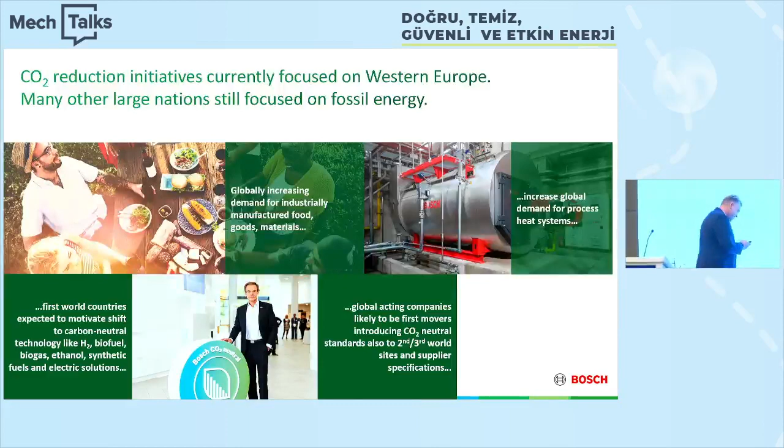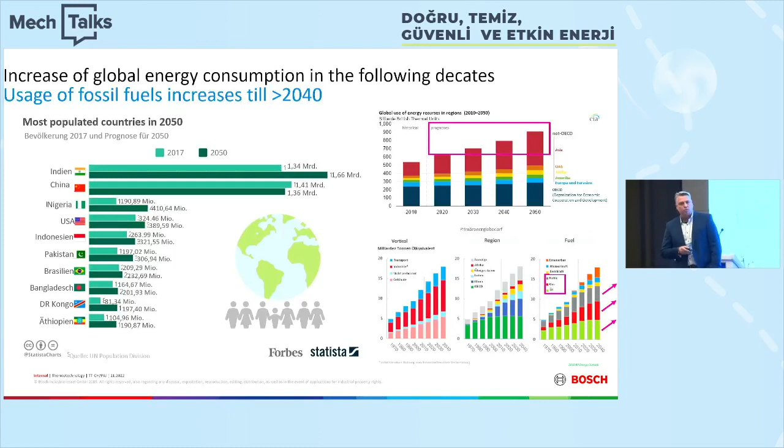So when starting a project to be CO2 neutral, I have basically two options. First of all, optimize my existing plant with energy efficient solutions. The higher the efficiency of my plant, the lower my fuel consumption. And we believe 20 to 30% of the energy used in the world nowadays can be saved by using the right technologies, which are available.

The future is the use of alternative fuels. Alternative fuels are available nowadays, but in very small amounts. And it only makes sense if these fuels are produced green, with green energy, and then they call it carbon neutral.

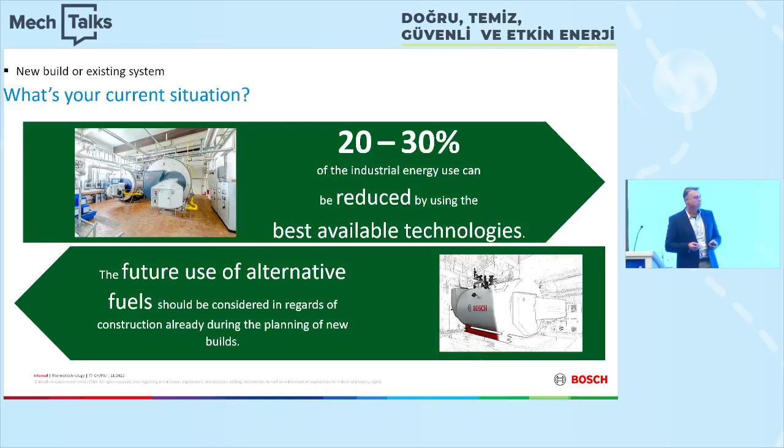What are alternative fuels? Or what are the main characteristics an alternative fuel must have? First of all, it must be available. I don't need to plan a plant for H2 firing if I don't have H2 available. I come to this later.

It must be ecological. That means it makes no sense to produce these fuels with a high amount of energy, like electric energy, or even hydrogen. But there are different hydrogen levels, I'll show you in the next slide. It must be economical, of course, otherwise it does not make sense; it will increase the price of all products, etc. A certain amount is accepted by the population or the customer, but this always has limits. And last but not least, it must be storable.

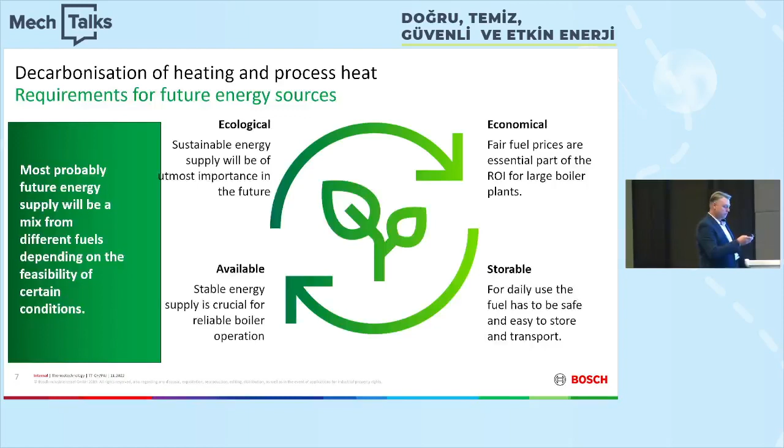So hydrogen. Hydrogen is now in everyone's mind as the fuel of the future. What is hydrogen? Hydrogen is the smallest atom in the world, and it has the ability to diffuse into metals. So this is a burden at the moment; special materials are needed for hydrogen. The flame temperature to burn hydrogen is about 2000 degrees centigrade. And hydrogen has about 3 times less heating value than natural gas, so the consumption will be 3 times more to have the same amount of energy or heat.

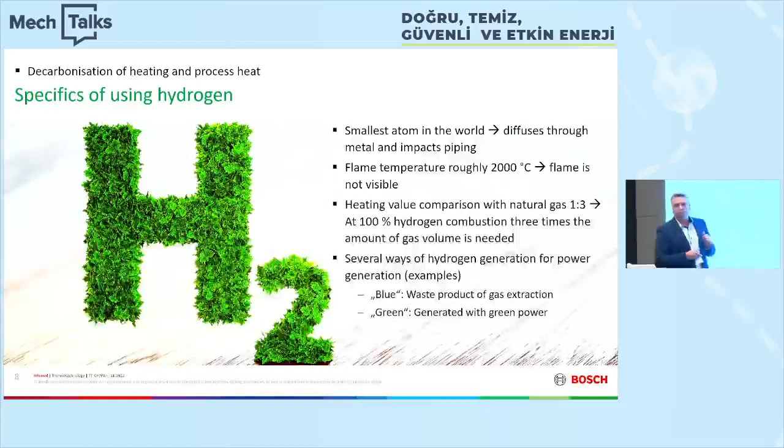There are several ways to produce hydrogen. One is called blue hydrogen and the other green hydrogen. What is the difference? Green hydrogen is CO2 neutral. That means it is produced using energy from wind or solar power, without using electric energy from the grid or the power plants. This is real green hydrogen.

Then we have something in between, called turquoise hydrogen. It's made by methane pyrolysis with energy from the grid, from the public network or the power plants. And gray, this is bad hydrogen. It's made by electrolysis with electric energy from power plants, could be coal, could be nuclear, whatever. Definitely, you need a lot of energy to produce hydrogen at this moment. And the question is, where does the energy to produce the hydrogen come from? Is this energy green or not?

The big benefit of hydrogen in any case is that it's storable. This is its biggest benefit, because storing electricity is quite difficult at the moment. You need big storage, large amounts of batteries, which are also not so environmental to produce.

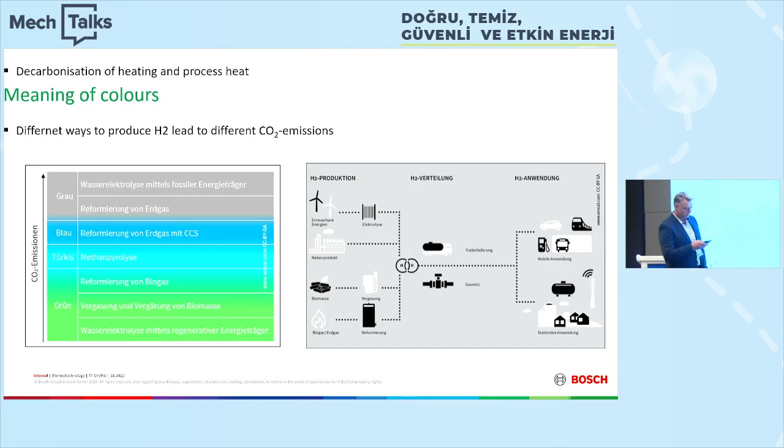So, overview. Motivation. What is the motivation to use H2 as fuel? Again, if it's available, it's a very quick solution to be CO2 neutral with my existing boiler. The existing boilers can be transferred or transformed to burn or to handle H2. It's not a matter of the technology, it's just a matter of availability. Also a fast and quick solution which is available. It is transportable. This is also a benefit.

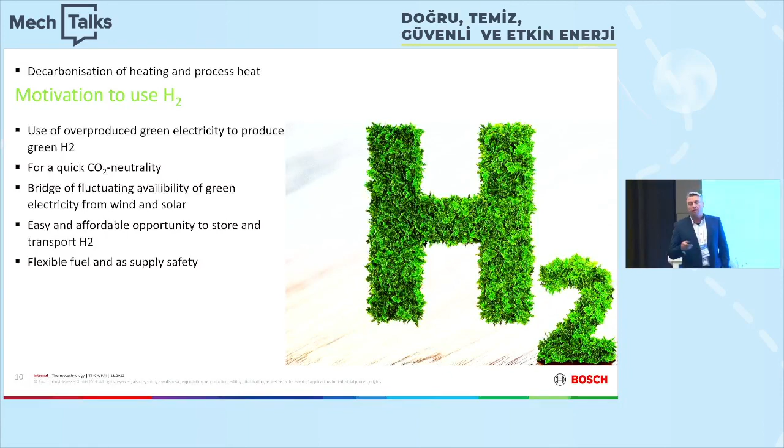Nowadays, the gas network is not capable for H2. Meaning, in Europe or in Germany, in the German network for natural gas, there is already 10 to 15% H2 in this network, but that's the maximum at the moment. So the complete network must be built to be capable for H2. And this is not a short-term, this is a long-term solution.

Again, a slide about the drive or the benefit of green energy, green H2. It should come either from sun or from wind or from any other source which we don't know yet. Heat pumps, geothermic heat from the ground, from the soil. So then water is divided in O2 and H2. We have H2 in gaseous form available. This can be burnt for the boiler, for the process heat, for heating. And it can be also transferred into electricity again.

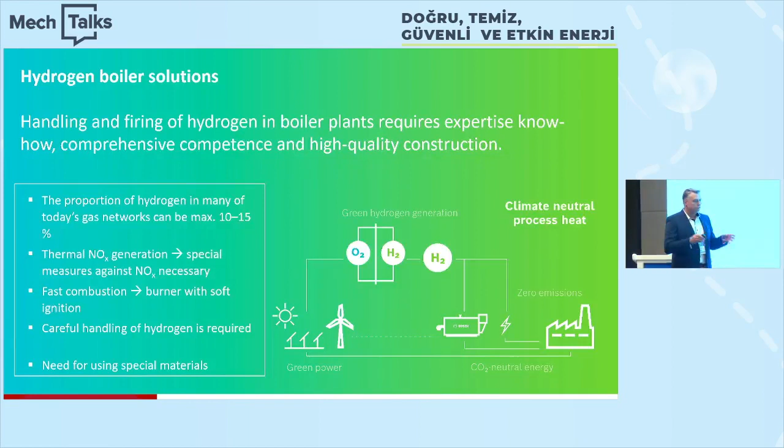Now you ask, does it make sense first to put energy in, to produce H2, and then with fuel cells you produce electricity again? This is only for storage reasons, transportable, localization reasons. What alternatives do we have to the hydrogen solution? Well, what is available at the moment? We have a hydrogen finished product on the market, which can run 100% on hydrogen. This is a conventional boiler with a special firing system, a combustion system, made for hydrogen. Okay?

Hydrogen ready is if a customer nowadays is investing money and he knows in the future, I want to be on hydrogen. He can buy a hydrogen ready boiler. And when hydrogen is available in 20 years, he only changes the burner side, the combustion side, and he runs on H2 and is CO2 neutral.

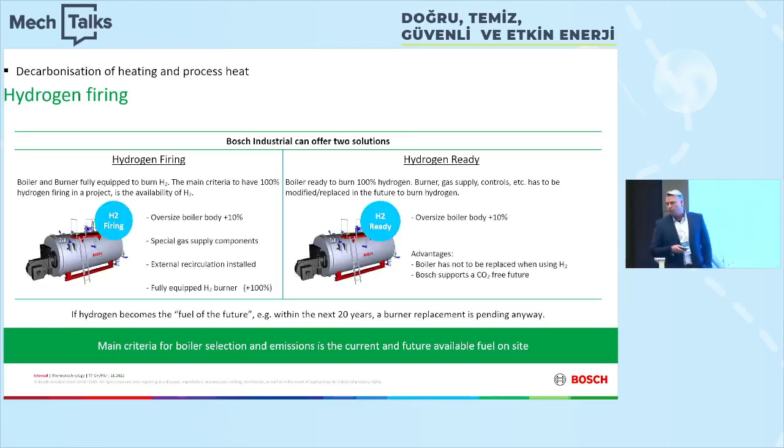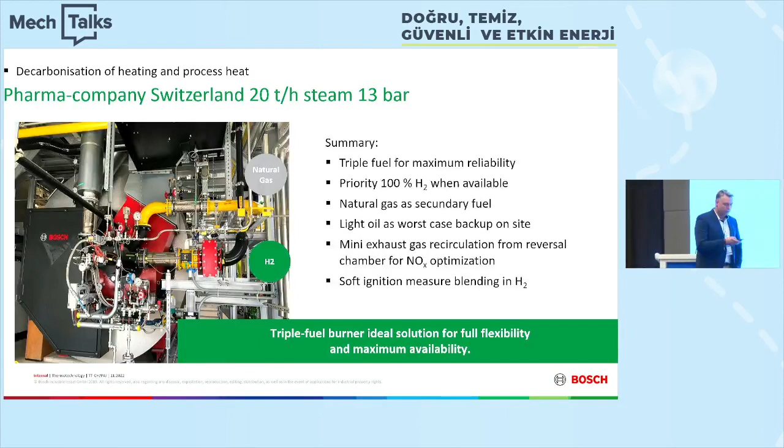This is an example of a company in Switzerland. It's a pharma concern, and they use 20-ton boilers running on 100% hydrogen already. They have the benefit that the hydrogen is produced in a plant next to it, and it's a side product of their process. So the benefit is also it's close, it's available, and it's kind of affordable. Plus, for production security, the boiler is also still equipped with a natural gas line.

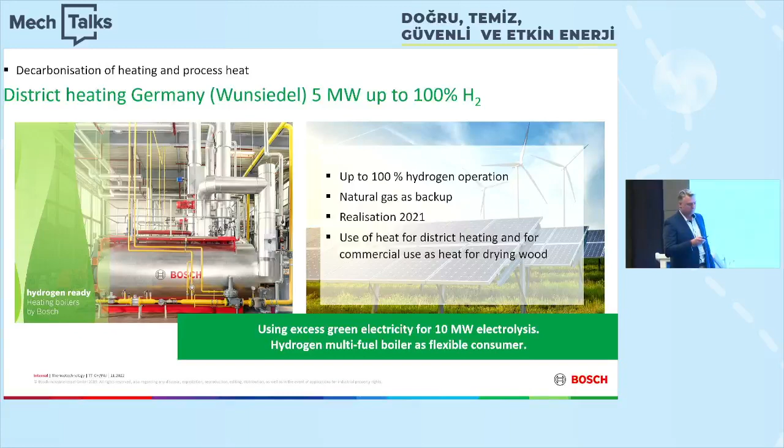This is a plant we have in Germany. This plant is a wood producing or processing plant. They do wood chips, they do decor woods, and they have their own energy supply or central. They use turbines. With the turbines, they produce electric energy. With the electric energy, they make H2. The H2 they use again for combustion, for firing. Also, you see they are available. Now, my time is running out.

Now you ask the question, why produce H2, using a lot of electric energy to do that, why not put that directly into the boiler to produce steam or process heat with electric energy? And this is our latest, or let's say since 2 years, our most asked product. It is an electric steam boiler, directly electrically heated, up to a capacity of 7.5 tons with a connection load of 5.1 megawatt. Does this make sense?

Yes, it does, if the electricity comes from natural resources, from green energy, wind power, solar power. And that is a direct use of the electric energy produced into the process heat. So at the moment, this is the most feasible solution for a customer who wants to go CO2 neutral.

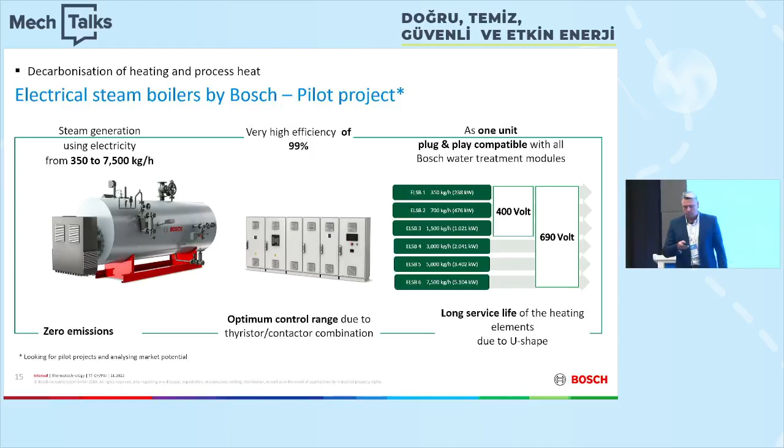Then we have a combination of both. This is a conventional boiler with a conventional burner and an electric heating element. That means the boiler can run on both fuels. Both fuels support each other. So think about it, you have photovoltaic PV on the roofs during the daytime. My photovoltaic is supporting the boiler. It's free energy. It comes from the sun.

It's green. During the night, or if there is cloudy sky or rain, like it is at the moment, this burner can supply the boiler or the consumer at the customer with the necessary process heat. Also available, also possible with H2. And then we are again completely CO2 neutral.

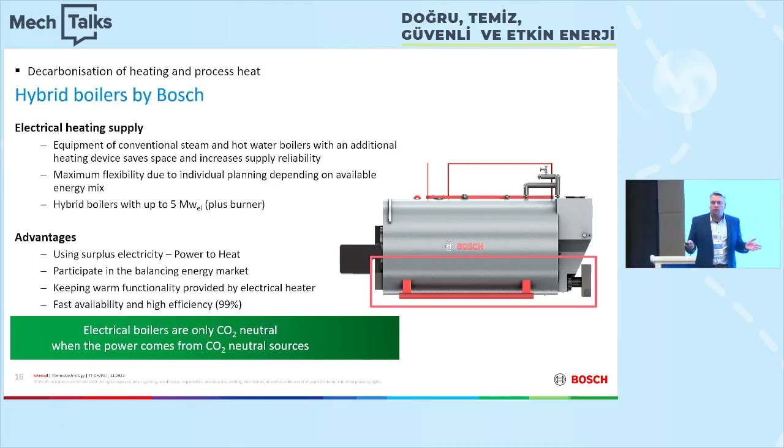Next topic is biofuels. Biofuels have been around for a long time. Wastewater treatment is a very good resource for biofuels. Biofuels can be fired completely without any additional engineering or any additional costs. Biofuels are in most cases available free of charge. And I take the example of big breweries, they have their wastewater treatment. Wastewater treatment produces biogas, and they use the biogas for their heating or for their process heat.

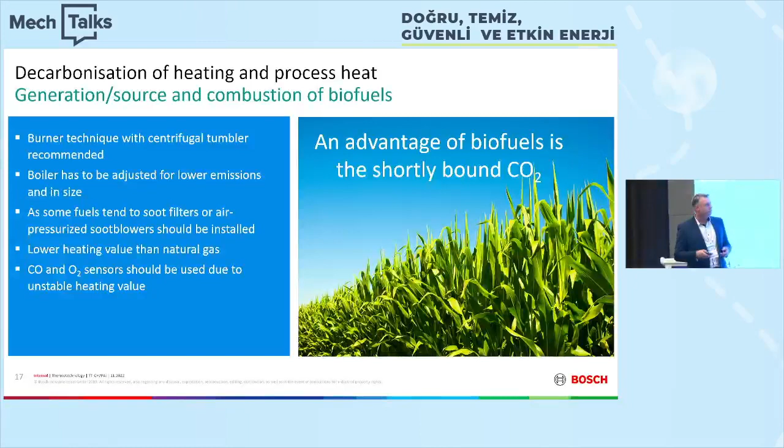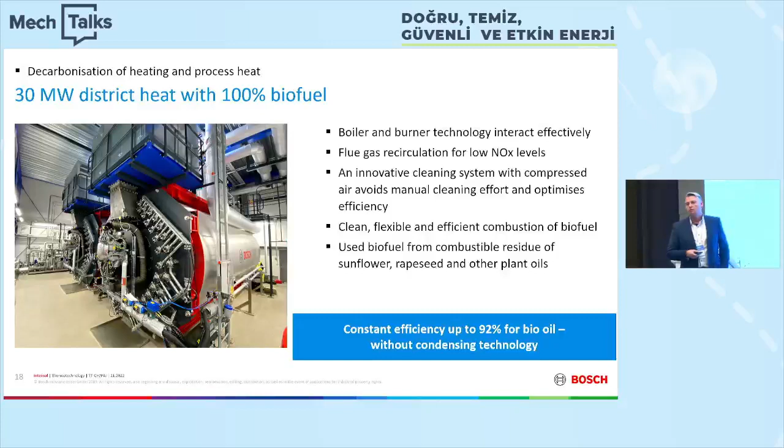This is an example of a biofuel boiler. Denmark is very, very into CO2 neutrality in general. And I would say in Europe, they are the first ones using CO2 neutral gas or fuels.